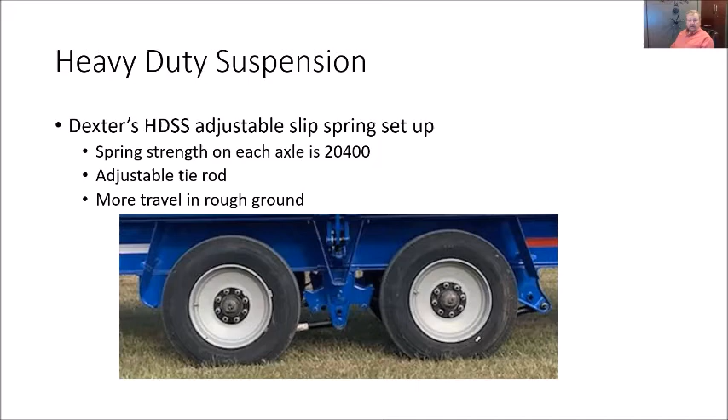It has an adjustable tie rod right here that goes to the front, so you can set this trailer up to be exactly parallel when it comes to travel and tire wear, and a lot of things that lesser trailers don't have the option for. This also creates a lot more travel than a normal trailer or normal spring setup would have on rough ground, which is what hay trailers typically operate under, in pastures and fields. So it's a different need.

This is a picture of the tire combination. The tire on this new setup is a super single. It's a 235/75 17.5 with an 18-ply tire, and this thing is massive.

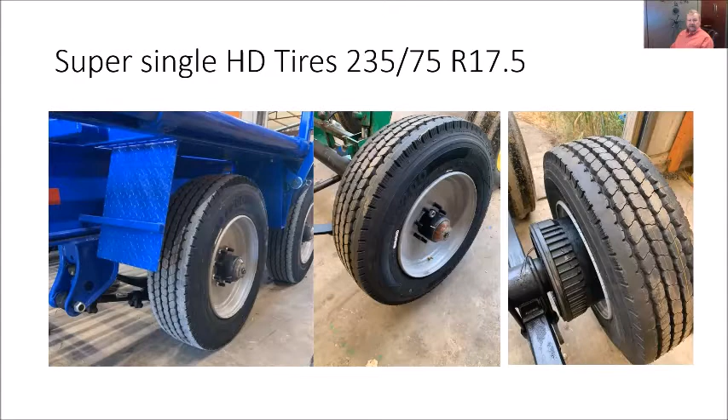The other change that we made this year was we went to Mid Way cylinders. We have a great relationship with them. This cost a little bit more money, but we thought it was a worthwhile improvement on our trailers to go with an American-made cylinder, so that if you ever had to have one rebuilt or changed, you could easily get parts for it. And we like the tie rod system because it's so much easier to service and change on cylinders as they wear.

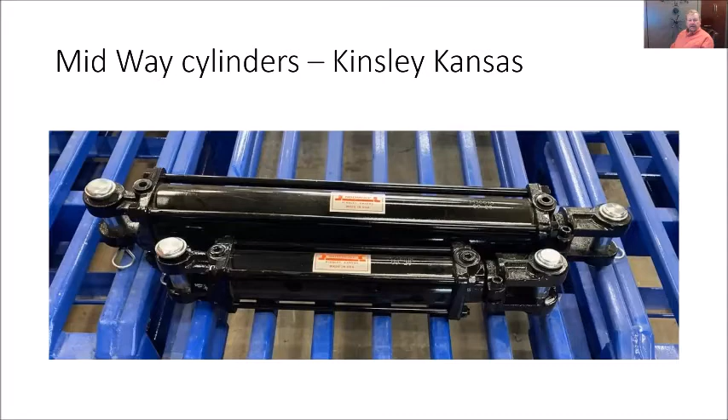These cylinders are made in Kinsley, Kansas. We are really proud to offer these on our trailer.

I'd like to go over some of the changes that we've made and things that our customers have thought of to make this trailer even better and stronger than it originally was.

First thing that you'll notice about this trailer is that we use 1-inch square tubing on the deck. It's 11 gauge. That first trailer had 14 gauge and it was extremely tough, but we thought we needed to make this even better. So our trailers come with 11 gauge tubing on the deck, and we moved our C channels closer together to make it even stronger.

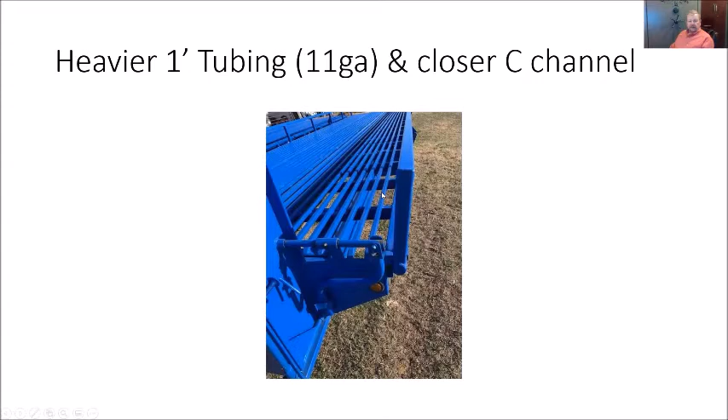And then we changed the width of the trailer up to the full legal width of 102 inches. Our old trailers were 99. This is the ramp on the back. I get a lot of questions about ramps.

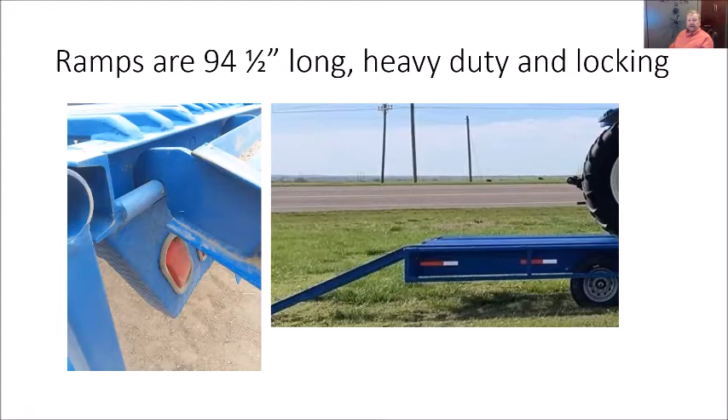We made these ramps as big and heavy as we can. They come with a heavy duty C channel, and they're 94.5 inches long, which is almost a full 8 feet. It seems like you can never have your ramps big enough, and the compromise for us was weight. I'll tell you right here in the beginning that the weight of these ramps is the worst part of this whole trailer. They are extremely heavy duty. The good thing is you shouldn't have to worry about bending these ramps.

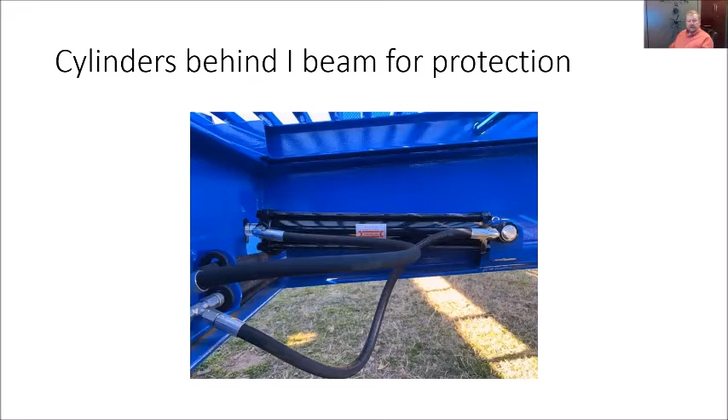One change we made is we put the cylinders on the back side of the I-beam to protect them while you're going through rough things in pastures, so that you're less likely to damage or tear off the cylinder.

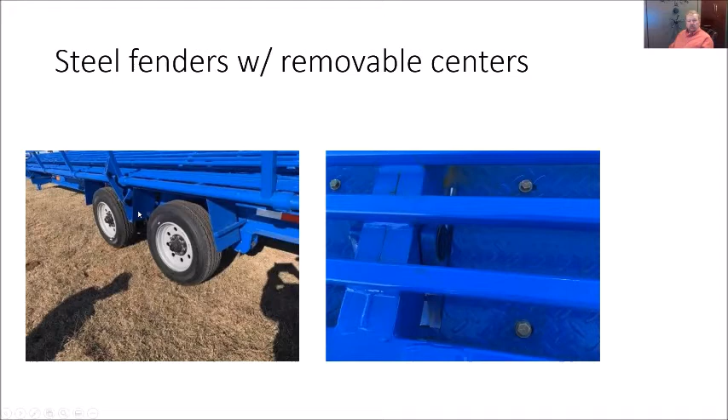We went from a plastic fender to this steel fender that protects your wheels. It has this part here in the middle that protects your cylinder on this side, and we made it removable. So you can take this center section out and work or service your cylinder or do anything you need to do. Or if you were to have a blowout and it tore this up or bent it, you can just take it off, straighten it out, and put it back on.

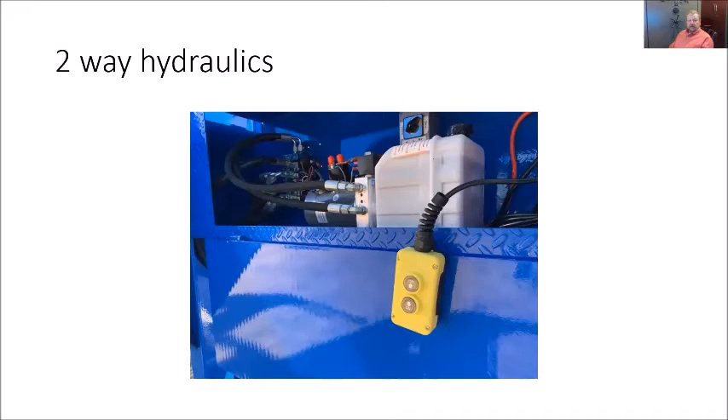We went from that first trailer having single hydraulics, which means they would only lift the load up - it didn't have the hydraulic option to drop the sides. Ours has complete two-way hydraulics, so the hydraulics will lift your sides up or your deck up and put them down.

The sides have the ability to go all the way up or all the way down, like it shows here. And when you make your hay cradle, you put it at about a 45-degree angle, and that makes the cradle on your trailer adjustable - we'll go over that in a bit. You can adjust this side up to fit the size of bales you're hauling, which is extremely handy.

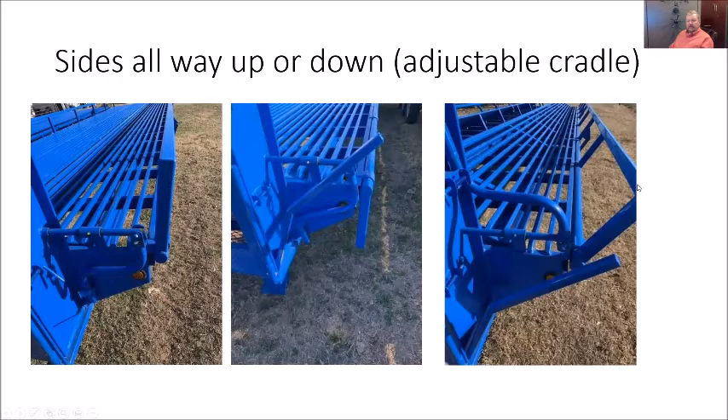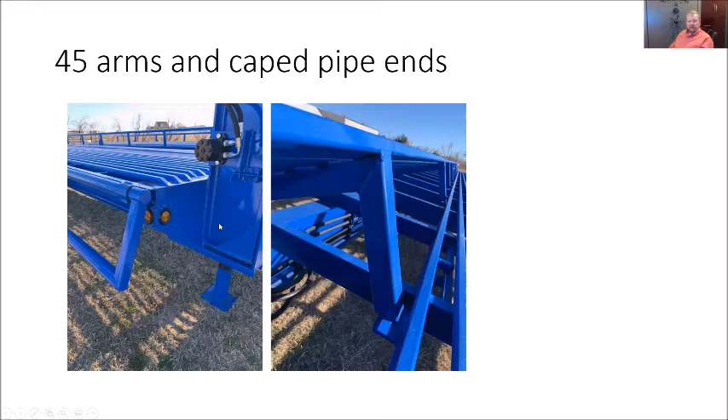We changed the way the arms and sides were made. Instead of having a flat weld here, we went to a 45-degree angle to shut that tubing off, and it makes the arm that holds your center decks up a lot more strong. The sides, we 45 them, and we cap the ends - a lot of little things just to make this trailer a little bit stronger and a little bit better.

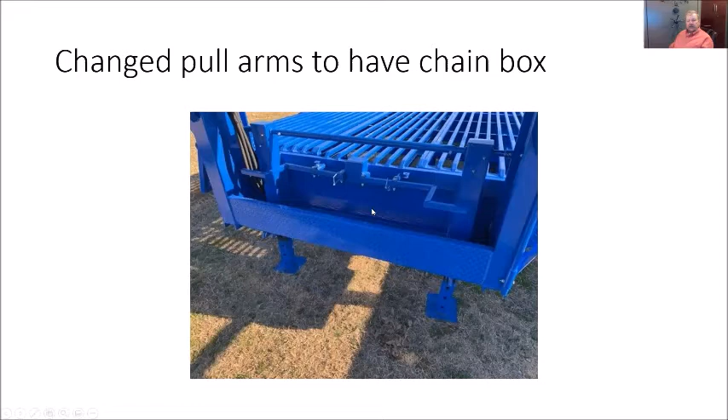We added a chain box at the bottom and changed the pull arms. If you look at our video, some of the videos show the arm hooked at the bottom - that was our very first trailer. You pulled down on these instead of out. This change gave us the ability to have the chain box and access things in the chain box. We have a completely sealed and locked toolbox here at the front.

When you lock this up, you don't have to worry about somebody stealing your battery. And if you have the hydraulic motor on your jacks, they can't even move your trailer up and down to steal it without tearing this lock off the front.

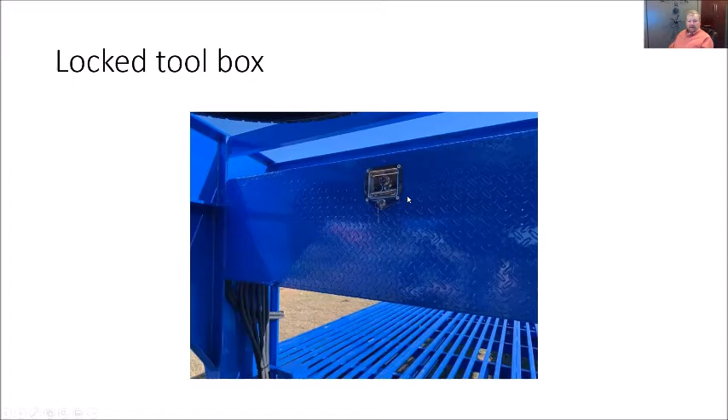Our trailers come with a built-in 18-amp inverter charger to keep your battery charged up. If you've been hauling hay all day, you can plug a 120-volt extension cord in here and charge it up. And if you have a new pickup that has 120 volt, you can plug this in while you're running your truck, and it will charge at 120 volts through the inverter charger.

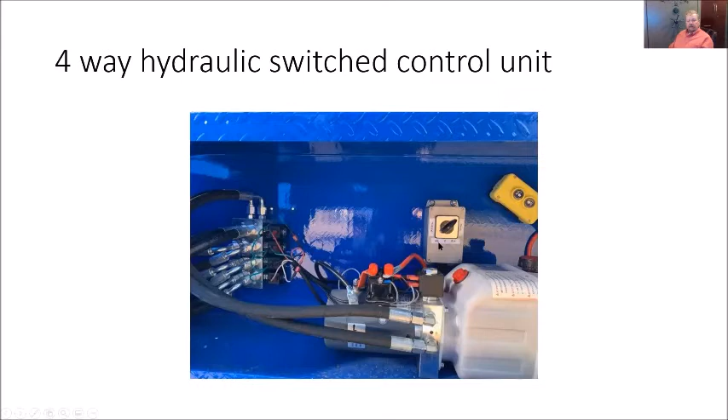This is top of the line, the biggest and best one I could find on the market. We have the switch here in the front with a 4-way selector switch, and you can tell there are 4 banks of hydraulic hoses. If you click over here to the left, if your trailer is equipped with a jack, this will run the motor on your jack and lift your trailer up and down. We have left, center, and right, and then of course off.

This is a dummy light. We have a switch on our trailer that you flip and it locks up the brakes, so when you're pushing hay on your trailer, it doesn't tear the transmission out of your truck. When you flip this switch, the light comes on. If you don't see that light when you're walking back to get in your truck, you'll still be able to see it in your rear view mirror, reminding you that you need to unlock your brakes.

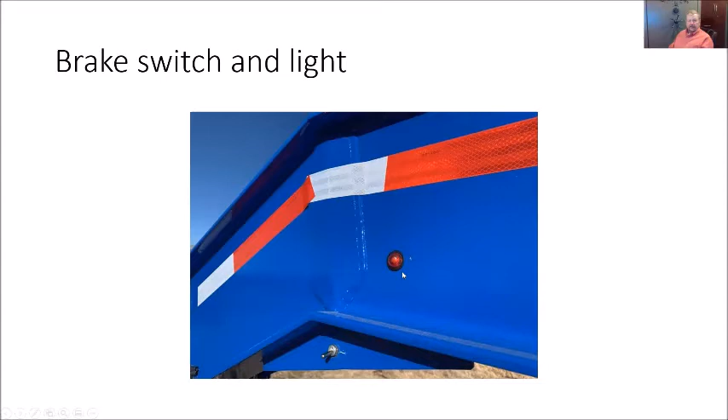This is how the hydraulic hoses are run underneath your trailer. We're extremely proud that Pisano Trailers added this option without even being asked. There's a metal cutout welded to the side with rubber grommets in it, and it just makes this trailer look 100%. Even from the underside that you can't normally see, it's just a really well-built trailer.

We take the brake wires, and they come in the normal wire mesh loom, and then we run it in a 3/8 hydraulic hose with heavy duty clamps on here. Then we tuck it up under so that wire is not dangling, and it should not get torn off by corn stalks or whatever you're hauling as things go underneath your trailer.

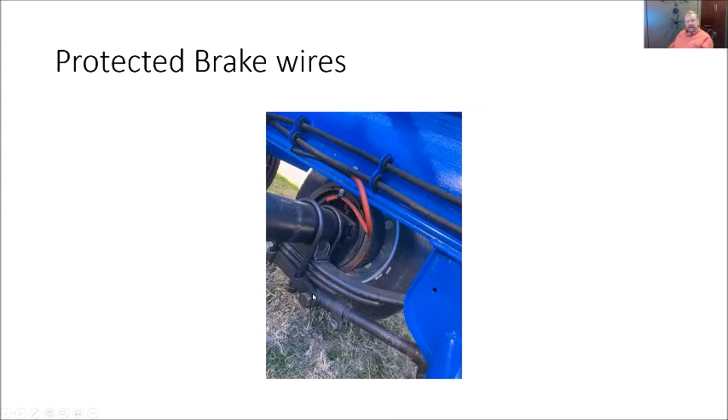This is also a good view to look at the massiveness of these semi springs on this, and the adjustable tie rod on the driver's side.

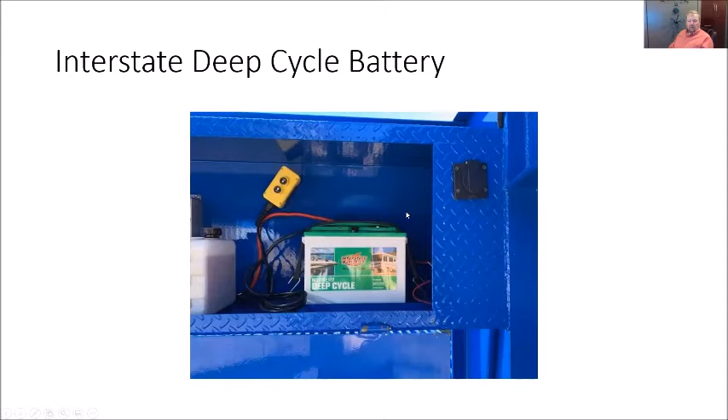Again, this is the back of the trailer. It's 102 wide. They come with an Interstate deep cycle battery on board that will charge off your truck, or you can charge it off here, or you can even get a solar charger.

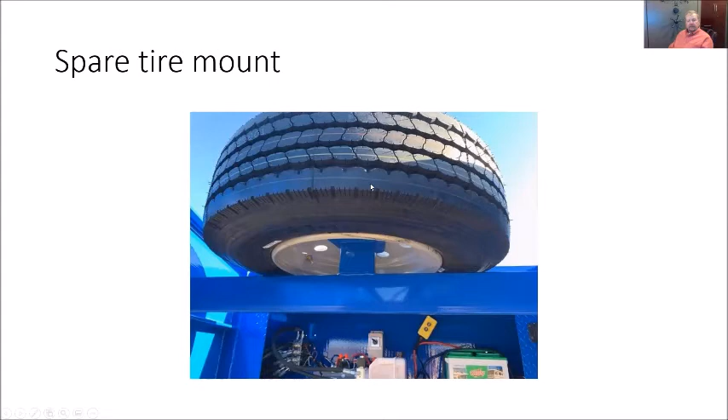This is the spare tire mount. This is one of the new tires mounted up there. These are extremely heavy, but this is a good place to keep it out of the way until you need it.

I want to talk a few seconds about the paint. Pisano Trailers, who build these trailers for us, sandblast the trailer when it's complete all the way down to bare metal. They put, I think they said, 3.4 mils of primer on and 5.4 mils of paint, so that this paint is extremely high quality and has a good shine to it when it's clean, which doesn't happen a lot after you start using your trailer.

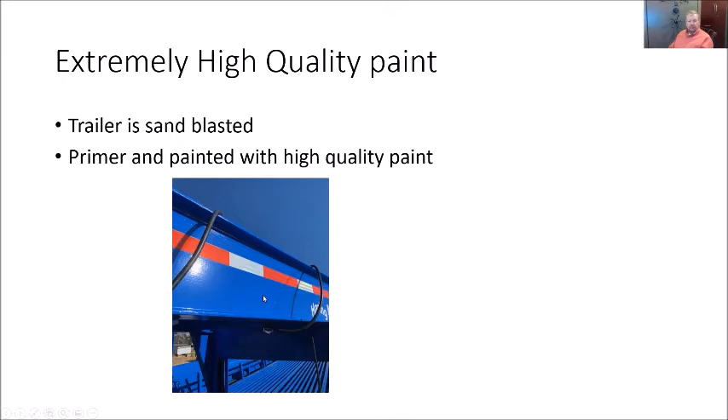But you can be confident that this paint should last. It's not a cheap paint job thrown on a bunch of oily metal that's going to start falling off within a year.

Right here, I don't know if you can see this, but there's a jack extension mounted right here in the front of your trailer with a little bolt in the bottom. This goes on your crank jack. If you ever get in a bind and have to unhook your trailer with hay on it, you can put this extension on your crank, and then you can drop your trailer down or lift it up.

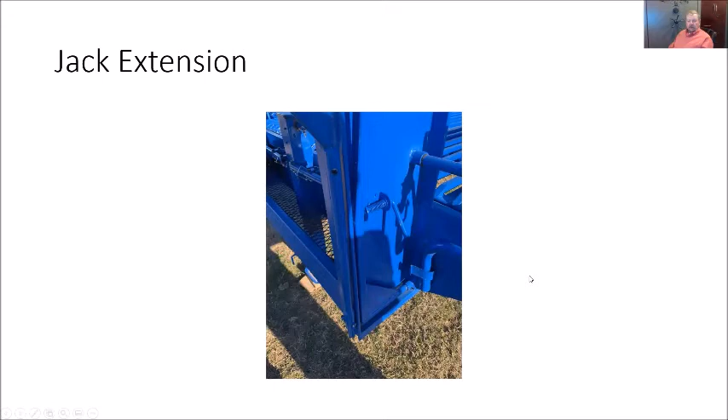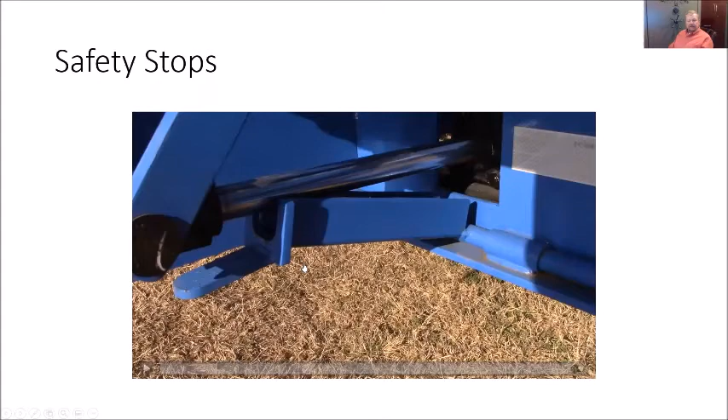These are the safety stops on the sides, and this is the normal configuration. These safety stops don't touch anything. They don't stop your cylinder, and they don't stop your hay load from operating. They just catch it so it won't dump on the highway if you have a hydraulic line break or bleed off. These safety stops are kind of neat, and I'll play this video here.

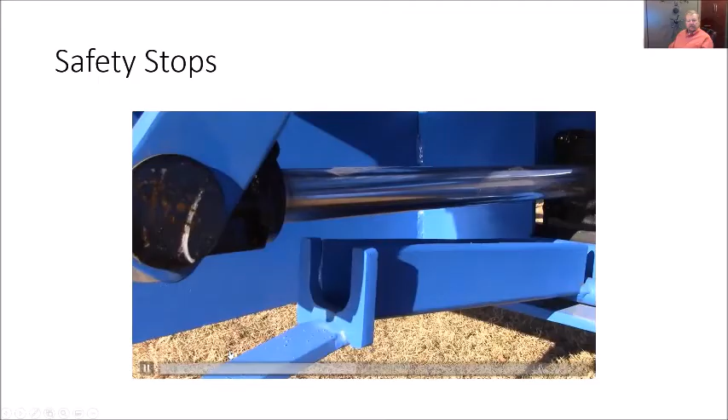They drop down out of the way and then lift up. This is the handle right here that my hand is on. You just pull that handle down, and that lets your safety stops go down and out of your way.

Trailer options: we offer a torque tube, but I put that on there because everyone asked about a torque tube in the beginning. This trailer really doesn't need a torque tube. It's an expensive option, but this trailer does not bend and twist like a normal trailer with tandem duals would, which has a narrow frame. This is a wide frame. That's why we have the super singles, so we can use the wide frame, and it doesn't require a torque tube.

I've had a few customers order their trailer with a torque tube, and after we've pulled it and used it a little bit, we noticed right away that it was almost too stiff. So I would suggest to everybody, I think you'll be plenty happy with your trailer without a torque tube.

We offer the double jack option. You can have one jack. The standard trailer comes with one, or you can order it with two.

We talked about the spare tire. That's an option. We don't include that on every trailer unless you ask for it, because a lot of farmers have stacks of spares at home that they take with them when they go on the road. So some farmers don't need a spare.

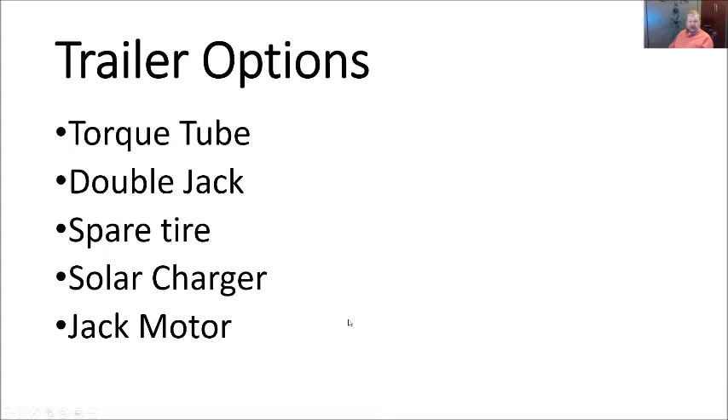We offer a solar charger for your trailer, and I'll show you a picture of that here in just a second. It's a nice option to keep that deep cycle battery topped off all the time. And we offer a jack motor. This is a hydraulic motor that goes on your jack, and it's my favorite part of all the options on the trailer, because I absolutely hate cranking trailers.

This is a picture right here of the solar charger, and on our website it says with plate. This is the plate that comes with it, and it comes from the factory. This is a 12 amp solar charger, the biggest and best one that I could find on the market. It mounts up front so that it's out of the way.

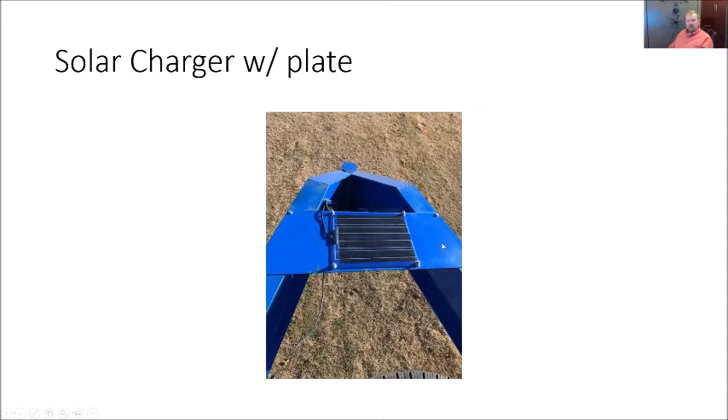And this is the hydraulic motor. This mounts on the side of the I-beam, and it turns your normal crank jack. This has so many advantages that it's a no-brainer, and I can't believe other trailer manufacturers haven't thought of this yet, but I think you'll probably see this setup on a lot of trailers. I absolutely dislike hydraulic jacks because all they are is a cylinder. And if something happens and your battery goes dead, or you have a seal leak or hydraulic line break or whatever, you're stranded.

With this one, it just cranks your normal hand crank jacks. We disconnect the hand crank, put this on the other side, and then, as you'll see here in a second, if something were to happen, you can undo the snap on the inside of the I-beam and move it to the other side, and you can still use your hand crank. You don't have to use the hydraulic motor.

So I'm going to hit play here. Let's turn the sound on.

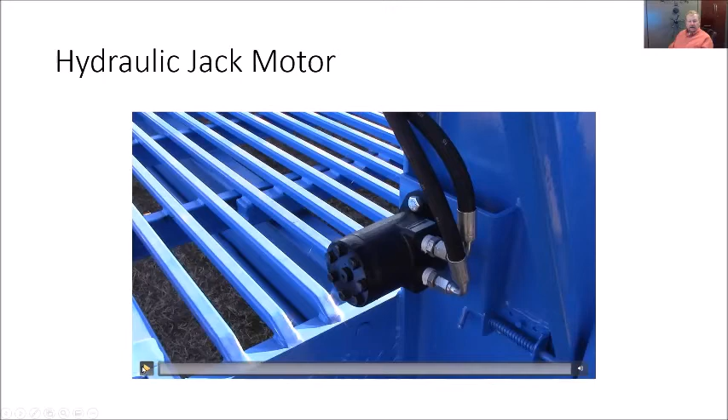It turns out, get that snap pin out of the other side and put it in this side right here. Then your hand crank will work. Otherwise, it just turns inside of that collar where your hand crank is. So I think this is a really awesome option. Like I said, I absolutely hate cranking trailers, and it's about half the price of hydraulic jacks, so it's an affordable option too.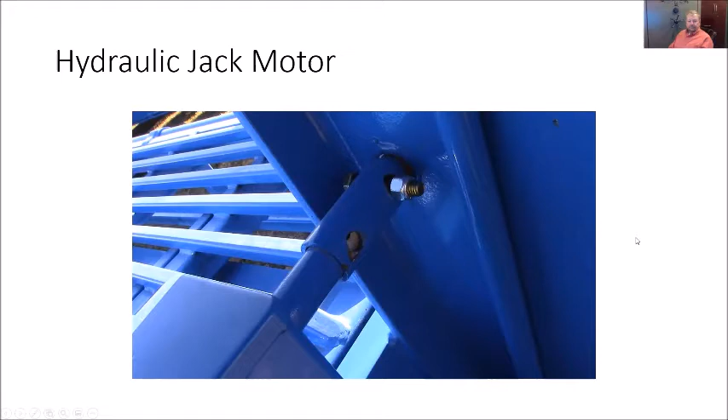Let's talk about some frequently asked questions. The first question that I had, and everybody asks me, is about duals. When I called Mr. Haring the first time and asked him why don't you make this trailer with the narrow frame and duals, he said this trailer does one thing that other trailers can't do, and that's it can dump one side at a time. The reason it's stable enough to do that, even on a hill, is that it has a wide frame. If you had duals, you couldn't do that.

So that's the reason we haven't offered it in duals. But I'll be honest, I've wondered about it because this new HDSS system that we use on our wide axles is so oversprung and heavy duty, I wonder if it couldn't handle it. But the other thing is if we went to duals, then on a 32-foot trailer, you would probably need the torque tube, and that's going to add another $900 to the cost of the trailer. So with these super singles, we think it's a good option. I've heard a lot of other people in the trailer business say they think more and more trailer dealers or manufacturers are going to go to the wide axle with super singles instead of duals.

The next question I get asked is about dealers. Do I have dealers or do I want dealers? Part of our business plan when we started was not to have dealers. The first few people that called me asking about dealers, I said, well, what percentage would you expect to make on the trailers? They said they'd like to see a 30% markup so they could give customers a 5% discount and still make 25%. Well, on this trailer, that's about $5,600.

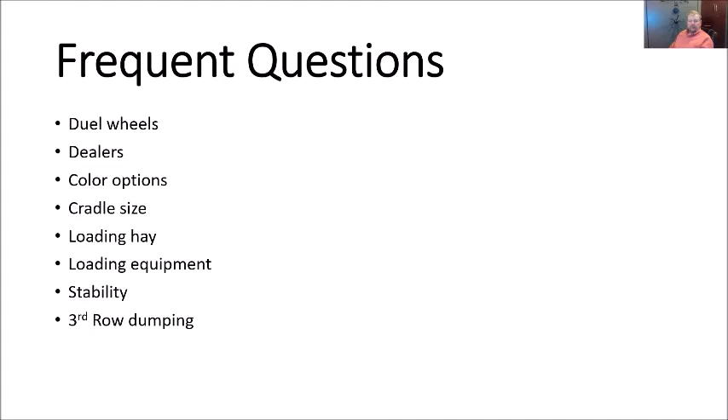You know, I tell everybody that if this trailer were only a flatbed trailer, this would be the best flatbed trailer on the market. And here's a few reasons why. The first one is this 11-gauge tubing is virtually indestructible. It never rots or rusts or wears out. It should be there for the life of your trailer, and it's an awesome deck.

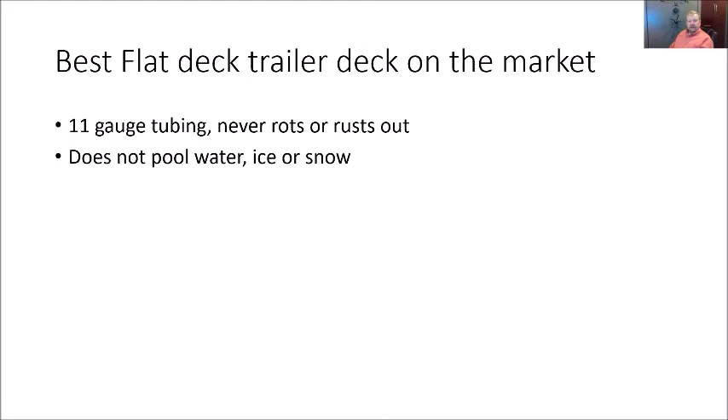It doesn't pool water or ice or snow like a flat steel deck would. If that were your option, it's self-cleaning. The hay typically just blows off the top by the time you get to your next load. If there was any hay left on there, it comes off. We have a customer that has a grain bin that he puts on his, and the grain just goes down through the middle when he center dumps it. And so that's kind of a neat feature of the deck.

But the best part, I think, is that you can tie down your load anywhere. If you're hauling a big tractor, you can even run the chains down through the deck and bring them back up around the I-beam to give you a lot more peace of mind when it comes to tying your load down. On pallets, we like to run our straps down the side of the pallet, go through the tubing, and then come out to the sides to tie them down.

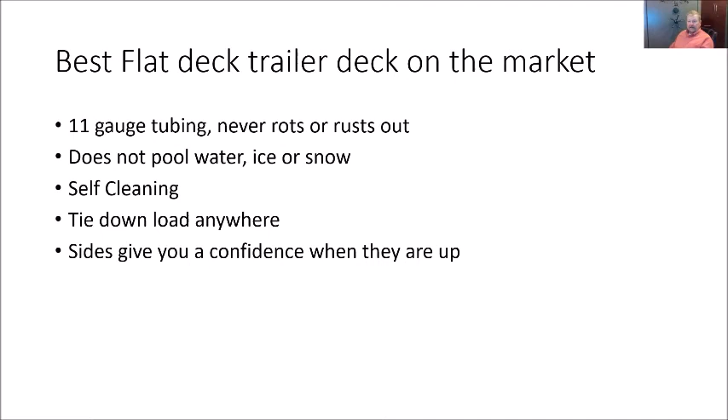So if you have a trailer that has a bad deck on it, I would encourage you to put this 1x1 square tubing on there. It makes your trailer so much better and gives you a lot more options than a normal flat deck trailer. The last one is when you put the sides up, they give you a tremendous amount of confidence, whether you have a skid steer tractor, pallets of chemicals, or anything on there. When you put those sides up, you know that if it comes off, it's probably going off the back, if anything, if something were to break or move or flex.

As far as a hay trailer, I believe that this trailer is the best hay trailer on the market, and for a few reasons. The first one is it's completely hydraulic, so anyone can operate it. At our house, my wife and daughters haul most of our hay, and in most farming operations, that's the way it is. Grandma and grandpa, moms, kids, and a lot of times the person can drive and haul hay for you.

They just can't lift up anything heavy, like if it was a cradle trailer or if the sides were not hydraulic. If you can push the button in, you can haul hay on this trailer. It's extremely easy to operate.

It's self-unloading. The hay just rolls off, so you don't have to have a tractor on both ends. And this is probably the best part of the trailer altogether: you can dump one side at a time, and that's huge.

If you are thinking about going to a double row hay trailer, when you pull into your lot with a cradle double row hay trailer, both sides have to unload at once, and that leaves a huge mess in your hay lot. Even though you didn't need a tractor to unload it, it's not very long until you have to get on the tractor and spend quite a bit of time moving all your hay to one side.

With this trailer, you can pull in, drop it on one side, do a U-turn, drop the other side, and you never have to touch that hay again until you're ready to feed it. And of course, it can haul a third row of hay.

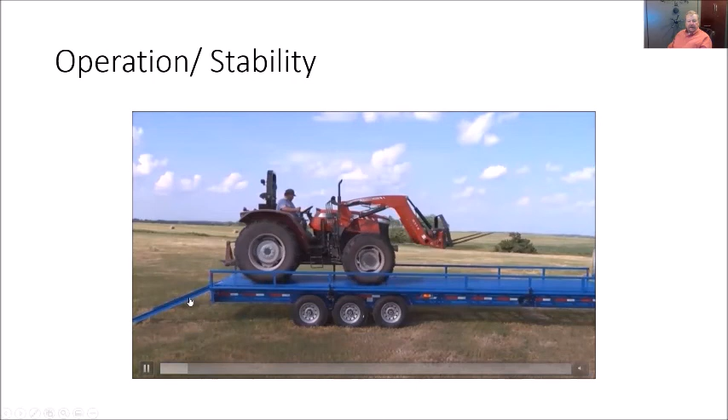I want to show you this video right here. This is our trailer in action, and I'll just talk about a few things here. This was one of our first triple axle trailers, and the ramps that we have now are a little bit longer than this one, so they won't be quite as steep. This was our very first prototype, which you'll see here in just a minute.

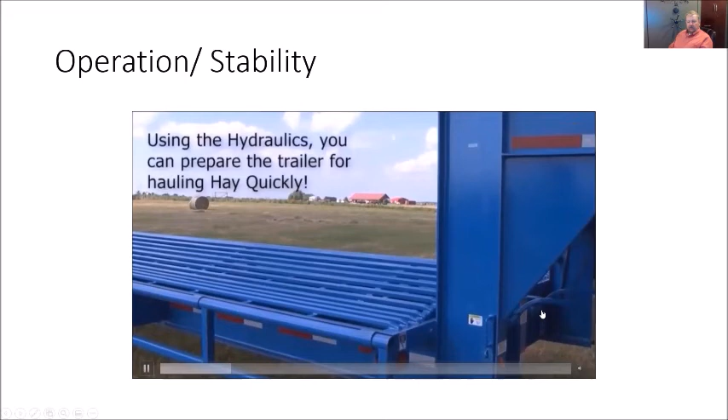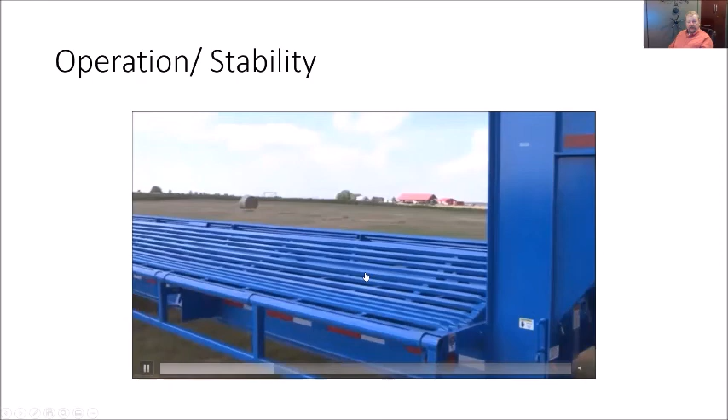You'll see that the handles here in the middle pull down instead of from the side. What I'm doing here is I'm lifting the sides up. When I push these handles back, it will put the stops underneath of them. And then when I drop this side back down, it puts the weight on all of these L braces all the way down this trailer. This is what holds the weight.

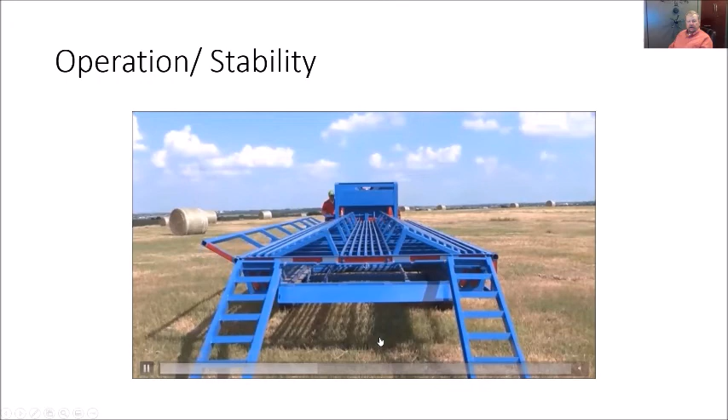Your hydraulic cylinders do not hold any weight. All they do is lift the centers up when they're empty and put them back down. You never use the hydraulics to try to help you dump hay or to push hay off.

Here is loading the trailer. This is a friend of mine named Henry, and he had some hay ready to go when we were ready to do this. So we're showing that you can load it 2 bales at a time, which makes it even faster to load when you can put that much hay on at once. Here's pushing the back on. We cut this off by accident, but you can see that hay.

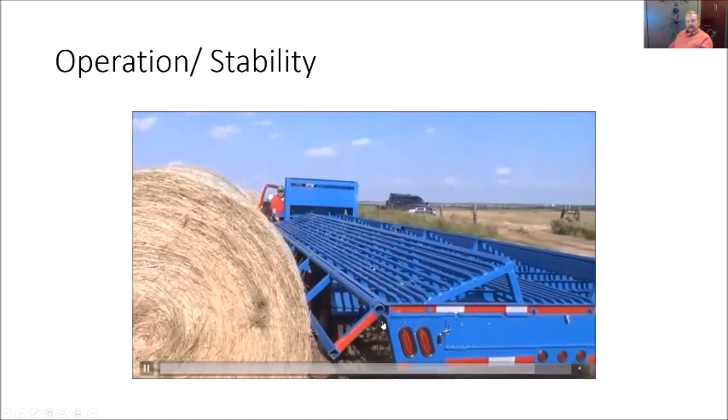Now this is downhill. The loaded side of this trailer is downhill, so when he does a U-turn and comes back here, the loaded side was downhill, and you can tell how stable this trailer was. I'm going to come up here and dump this load of hay uphill, and you watch this hay roll off and then come back down the grade and hit the trailer and then settle. Then I can drop the sides out of the way and drive out without tearing the net wrap off. And there's 3 rows of hay.

That's why we have increased this trailer. We've made the I-beam - most trailers have a 16-pound I-beam, and ours has a massive 19-pound I-beam. And we've made the neck of this trailer taller and longer to accommodate these new pickups.